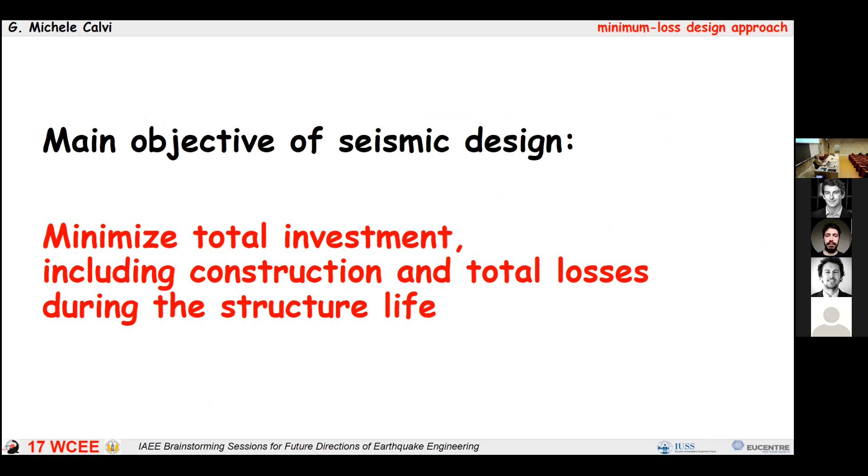But what does it mean, loss-based design? Let's try to go into this subject. The objective is clear: minimize the total investment, where total investment is what you spend to construct, what you spend to strengthen, what you spend to repair, and so on. This will become more clear in my next slides.

Of course, this is difficult as an objective to obtain, because the correlation between loss and strength is rather weak, and the correlation between loss and displacement is better, but still probably not sufficient.

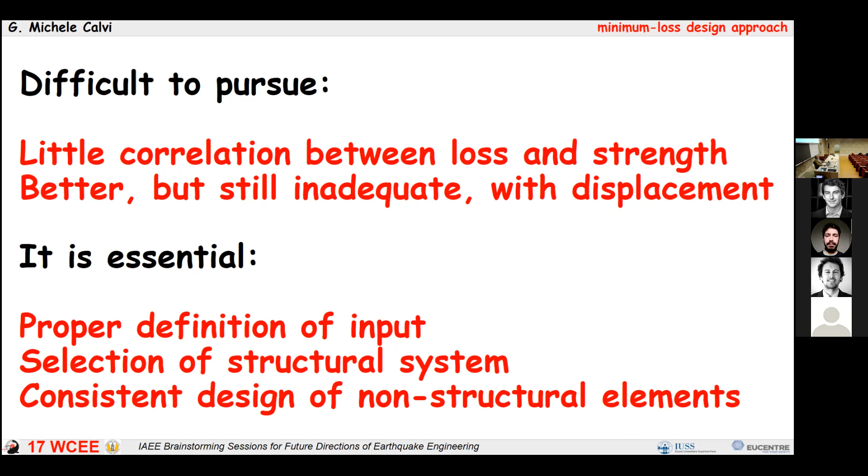There are, of course, approaches that have been developed more for assessment than for design. For example, probably all of you are familiar with the FEMA P-58 approach, and you are familiar with the separation of hazard characterization. First step, depending on where you are, you define hazard. Hazard is not only a certain acceleration or displacement value, but an association of intensity in terms of acceleration, displacement, and so forth, to a return period or a probability of exceedance over 1 year, over 10 years, or whatever.

The second step, familiar to all of you, is kind of a conditional integral. You look at the response of the structure: on one side you have intensity expressed as acceleration, displacement, or whatever, and on the other side you have consequences in terms of structural parameters. So for that input, you get that displacement, that interstory drift, or that floor acceleration, or whatever.

Then the third step is, as a function of the level of each of these response parameters, you try to figure out what is the consequence in terms of loss. In many studies, loss means direct loss, but as I will discuss, indirect losses are often much larger than direct losses, and therefore more relevant. The last step is a kind of decision-making, which is exactly what we mean when we say loss-based design.

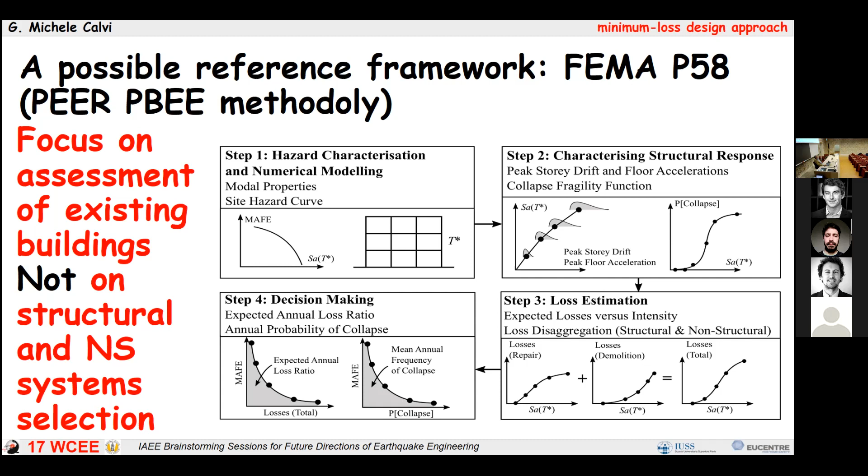Of course, when you talk about the second step, which is the one we've spent more time on, you may remember something like this. This is something I presented in Lisbon, I believe, at the World Conference, and it then became a paper saying, look, you could use some kind of pushover representation of the response of your structure, for a building in this case, and then you could say that for that level of interstory drift.

The level of interstory drift that you see on the right corresponds to that point you see on the left. Therefore, you could say that at that level of performance, you may expect a certain level of interstory drift, which means a certain level of expected damage, a certain cost of repairs, and so on. For this other level, you have another interstory drift and another series of consequences, and so on.

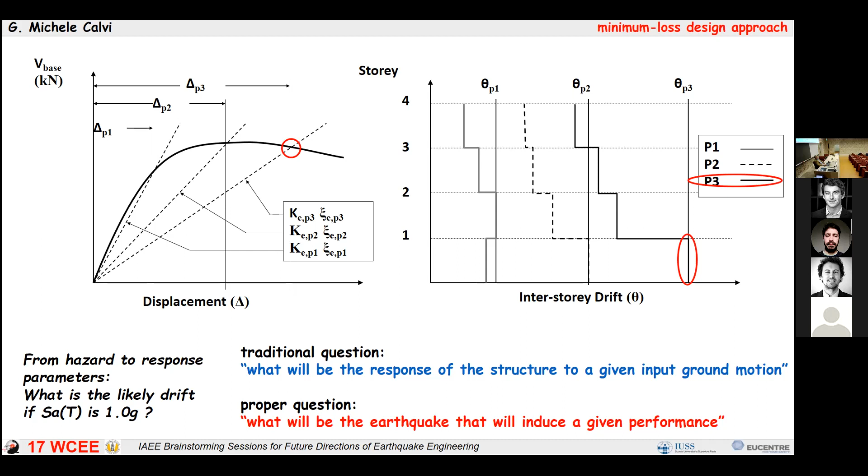So you can somehow associate some parameter that correlates response of the building and expected level of damage. We will talk about damage and loss soon. Now, when we talk about loss-based, it has become rather clear in recent years that the main parameter we're going to use is called expected annual loss. What is expected annual loss?

Expected annual loss is an integral of probability of occurrence times level of damage. If you consider that integral, you take a figure like this, which is only qualitative. You have on one axis the probability of occurrence, on the other axis, say for example, the expected direct damage.

What does it mean? It means that if you are up there at the top part of this drawing, you have a probability of occurrence which is high, which means that the return period is short. It could be that at the tip there, you have maybe 10, 20, or 25 years, or whatever. It means that it's the threshold level. For a higher probability of occurrence, you are assuming that the damage is below whatever you want to consider.

Otherwise, you cannot, you will go to infinite, and we do not like to deal with infinite numbers. If you look at the other side, at the point to the right, there the probability of occurrence is low, and if the damage is 100% in terms of direct damage, it means it is collapse, or a state of damage so high that it will be more convenient to demolish and reconstruct the building. So that point could be 100% in terms of damage and could be maybe 1,000 years, or 1/1000, or 1/500, or 1/2000, and so on. So you have the two opposite points.

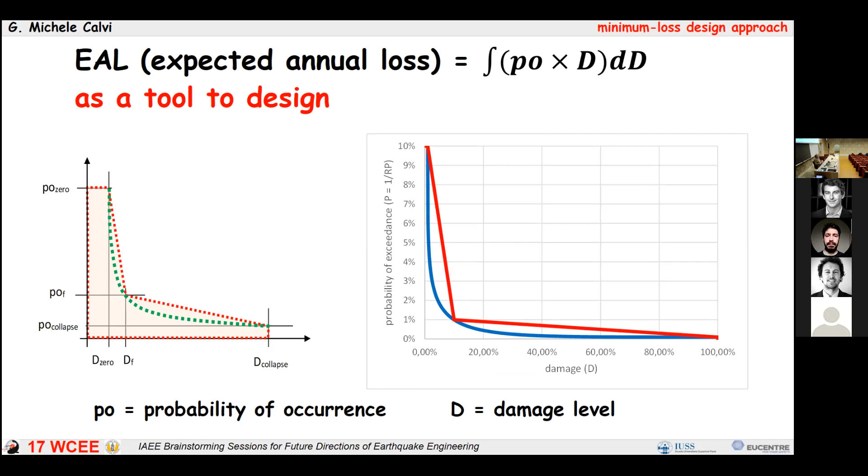We need to have some sort of representation of the entire curve that is not too far away from what actually happens. I don't have time to discuss this in detail, but this is an equation that I developed. I like it very much. You will understand why I like it very much. Let me say that this equation appears complex, but it's quite simple because there is only one parameter.

The parameter is that alpha that you see as an exponent to the sinus, and you see 1 over alpha as the exponent of the content of the reverse of the cosinus. You may wonder, how do you come out with something like this? I mean, this is very strange.

Some of you maybe know, but others can imagine how I came up with an equation like this. Okay, it's simple, because I was looking for an equation that, with only one parameter, was able to modify completely the shape of the curve while keeping 2 points fixed. Therefore only modifying the fact that it could be a straight line, could be thinner and thinner, but actually the same equation could also go to the other side. That equation, where you have the sinus to the power of alpha and the cosinus, is the equation that we use to represent the response of a damper.

And in a damper, you know that if you have say 0.1 at the exponent, it tends to become close to a square. And if you increase that, it goes down and down and down. It works beautifully. So you can just modify that parameter.

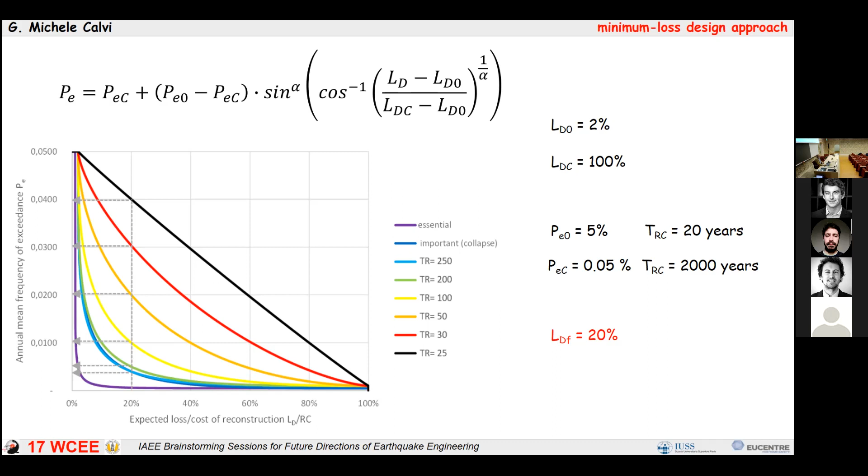So what I'm trying to tell you is something like this: if you accept to define the 2 points, for example, I don't know even what I've done here. You see, 2% at 20 years is the threshold. You don't care about the damage below 2%. Below 2% is nothing. And you have the other point that is here. I don't know what I use. Maybe.

I'm saying that if you decide that you want an expected annual loss of, say, 1%, you could know what level of alpha you should use, or vice versa. So the expected annual loss could become a real tool for design. You understand what I mean? A real tool for design means I'm accepting this level of damage. And of course, as a function of this level of damage, I will insure the building for that value, and so on and so forth.

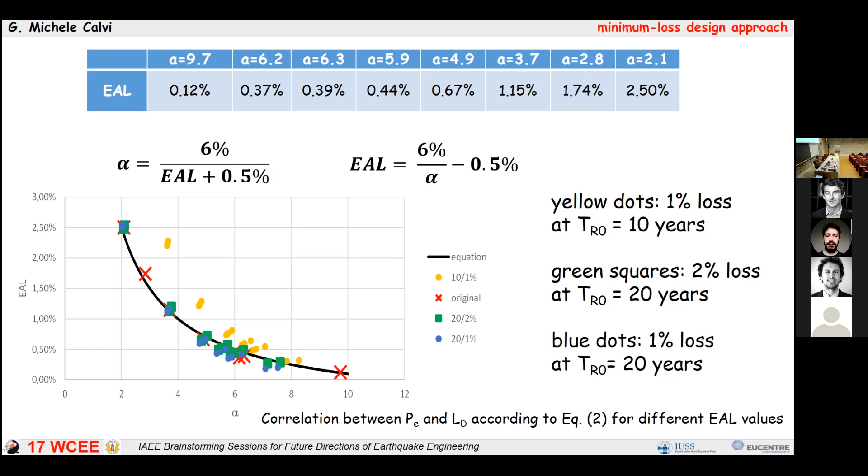What does this mean? Look here. It's like saying, if you take all these curves, they are different curves, characterized by different alpha. Or if you want, they are characterized by different values of the annual probability of exceedance and different values of the expected loss average per year. And if you take 72 years, as you know, that's the probability of occurrence of 50% in 50 years, which is often the figure that we use in new design for a state of limited damage.

And you say that maybe the state of limited damage is 20% of the cost of reconstruction, then you see that you are close to the green line, and the green line is expected annual loss of 0.8%, maybe slightly higher than that.

I'm trying to conclude in this part that we are often designing, without knowing it, for something which is in the range of 1% average expected annual loss for new buildings. If you ask, or maybe there are here people who work on risk assessment and so on, you will find figures that are much lower than this value. I tend to believe that the reason is that—

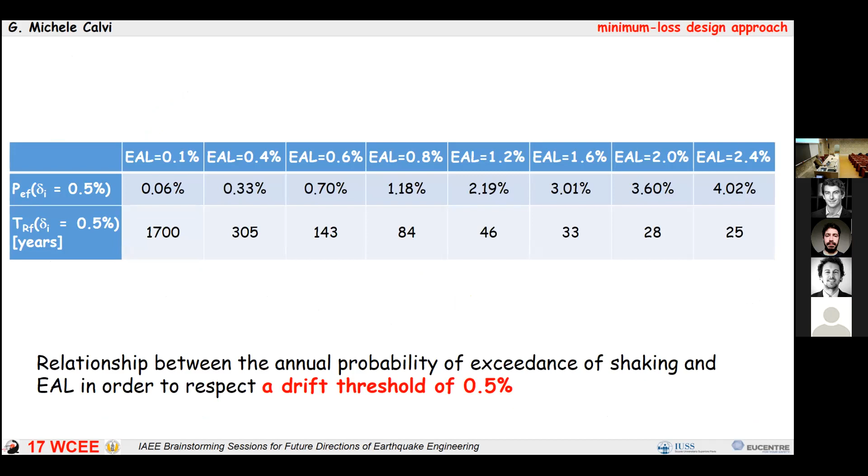But anyway, I'm ready to discuss this. And don't forget that I've not yet talked about the indirect losses. So this is exactly what I was trying to tell you. But there is one more point I want to underline. And let me go back, then I'll come back here.

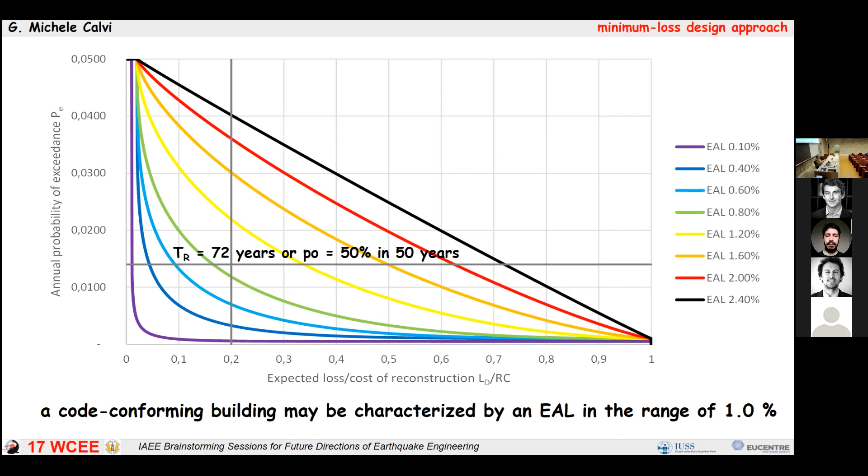So let's go ahead on this. And what you see in this plot is that the correlation between expected annual loss and one intermediate point of control is very strong.

But to modify the other two points, the threshold value and the probability of occurrence of collapse, does not change very much the shape of your curve. The losses are not significantly affected if you modify the probability of occurrence of collapse.

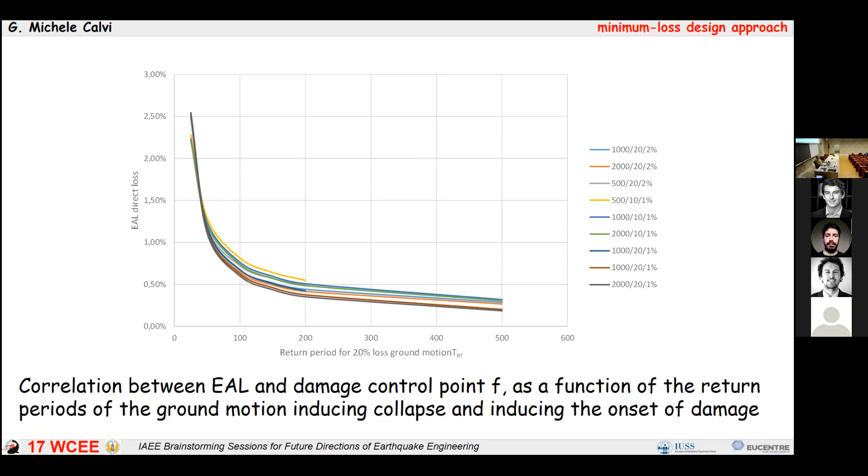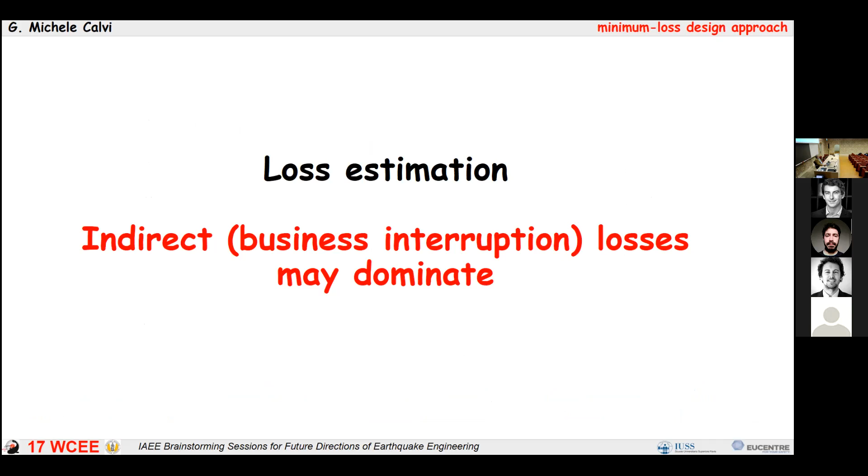Let me now have a quick glimpse into indirect losses. Indirect losses essentially is business interruption. As I already said, for a hospital it's not relevant—you want to have the hospital working after an event. But for other buildings or bridges, it may be relevant. So let's look at the simple case, the residential case.

Suppose that to relocate a person who remains without a place to live costs society—doesn't matter who is paying, I'm not talking about insurance or the state or whatever—35 euros or dollars per day. Suppose the cost of reconstruction is 1,000 euros per square meter, and suppose that on average a person occupies 25 square meters. These are all assumptions; you can change these figures.

If you accept that, and then consider that if a building collapses—so 100% damage—maybe the time for reconstruction is 2 years, then you do a simple calculation and find that the ratio between the losses due to indirect costs, defined here as relocation of people, and the cost of reconstruction is about 1. This means they are in the same order of magnitude. If you take 2 years, the cost is about 0.14% of the total cost of reconstruction per day.

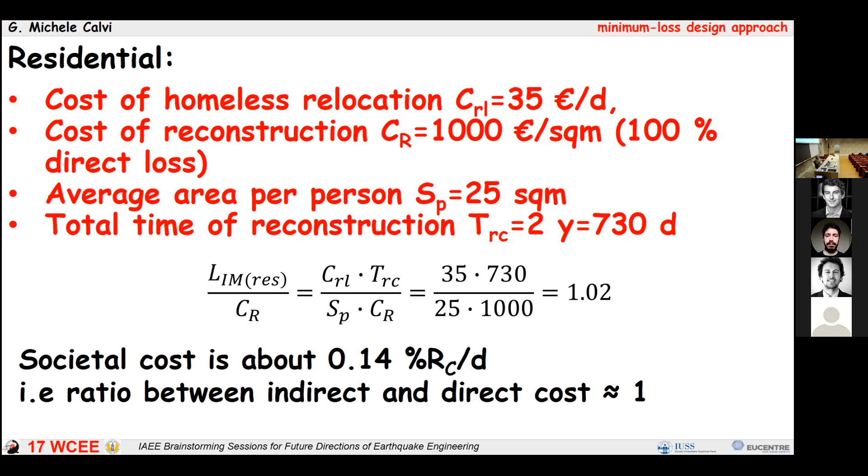But if you do the same calculation for bridges, you change your point of view: you say I have a certain number of vehicles crossing the bridge—this is easy data to obtain—and then you know what the detour length is. If you cannot pass on a bridge, how many kilometers do you have to go? Then you consider a cost per kilometer—consuming gasoline, increasing pollution, and so on. This is a general societal cost.

And then you do the same thing. You find out that for important bridges—which doesn't necessarily mean long bridges, it could be an overpass on a freeway with 10,000 vehicles per day, so a small bridge—the indirect cost could be much higher, could be 5 times.

If you go into the industrial problem, it's impossible to do this calculation directly. You can only go and interview the owner and ask, what is for you the cost of stopping your activity? But you should also remind him that his cost is also losing clients who will go elsewhere—it's very difficult to conquer a market again once you lose it.

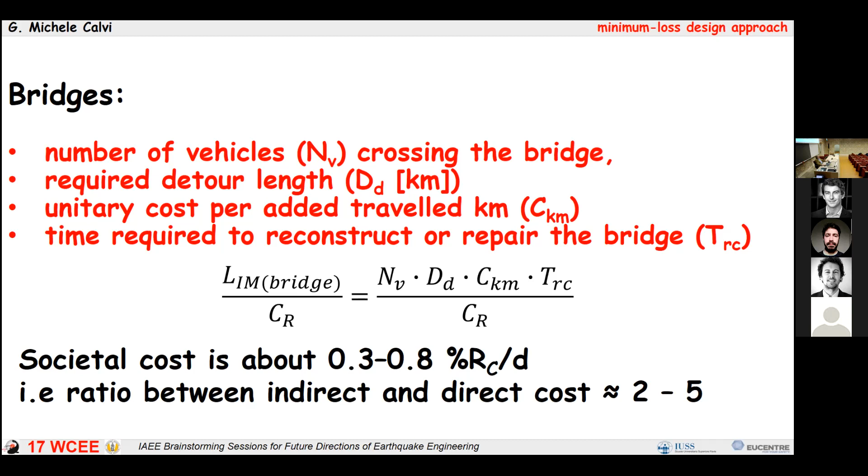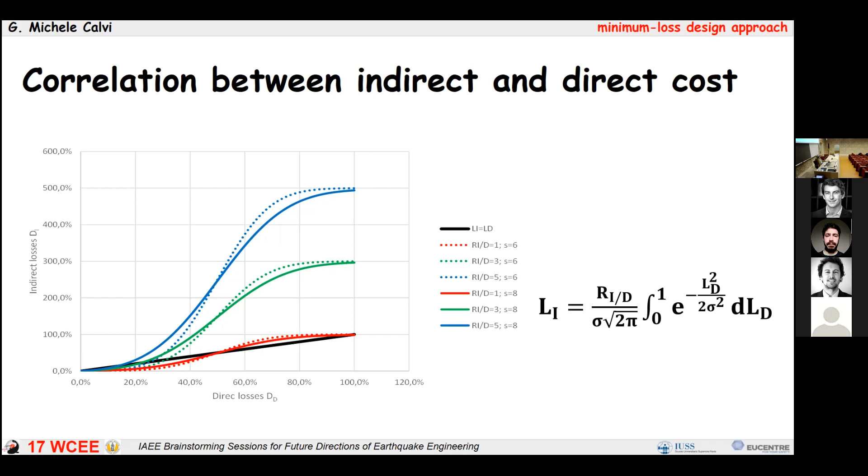So you use something like this and do all your exercises, and you come out with something like this, where the equation I showed earlier—expected annual loss equals 6% divided by alpha minus 0.5%, or the reverse—now seems a bit more complex, but not that much, because here there is RI over D, the ratio of indirect to direct losses. This comes out with something like this, and the dots are calculated points—you see this is not too bad again.

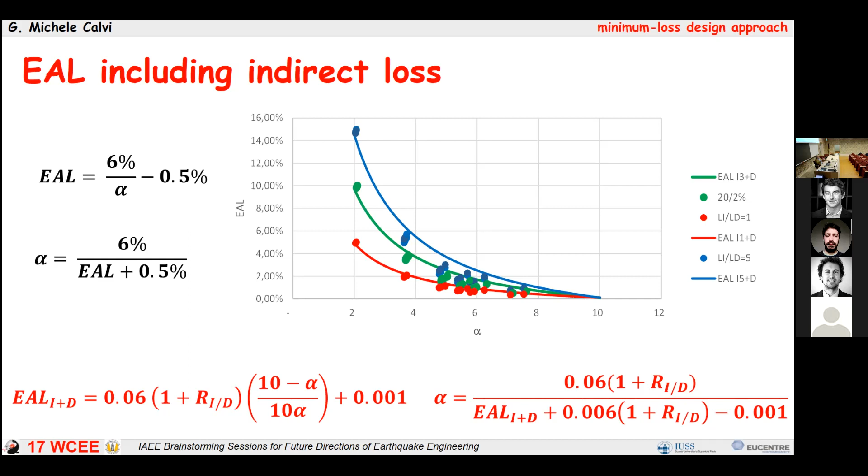So you see that your expected annual loss is increasing very much and is rising rapidly here. This kind of curve tells you that, if you look only at losses, your target design is probably in the area where the curve is not steep anymore and tends to become flat. There is no reason to design for a point close to the end of this curve, because you are not increasing the quality or increasing your savings. It will not be convenient. You should go to a point where you're still decreasing, and then you go.

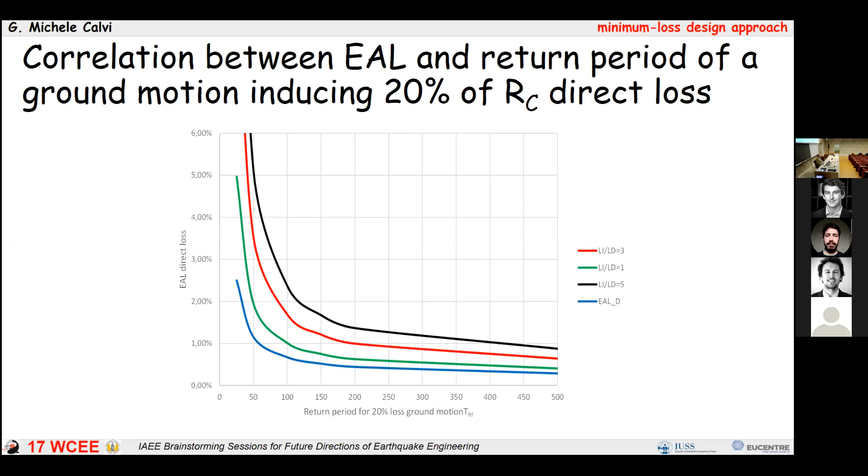So it means that for the black line, you will move to the right with respect to the blue line. It means that you will design for a longer return period or a lower probability. If you have more damage, if you are expecting more loss, you want to design for a lower probability of having an input ground motion that will induce the same level of damage.

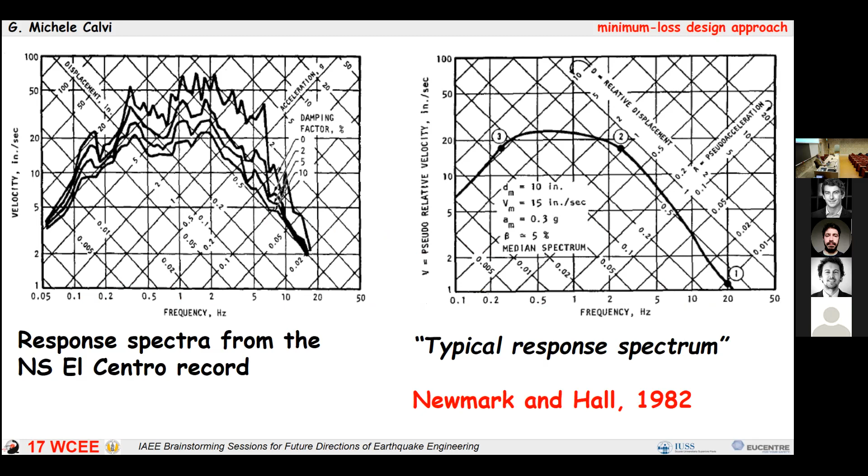Now I will go very quickly because I've already discussed this in other seminars, and maybe some of you were here. Of course, there are a number of ingredients that enter this discussion from a practical point of view. One ingredient is the definition of seismic input. Guido Andreotti has been working with me on this a lot. You may remember, if not go back and read again, what happened between the 40s and the 70s, where the spectra were defined.

You are probably familiar, or will be familiar, with displacement-based design, where the logic is that instead of using a force reduction factor, which could be 3, 4, 5, or 6 — a huge change — I only use a correction that takes into account the dissipation of energy. This correction factor is probably in the range of 0.6 or 0.7, certainly not smaller than 0.5, or 2 if you want to use the reciprocal. Using many different possible equations, you see that for a ductility of say 2 or 3, you are in a range of 0.6 plus or minus 10%. If you are in that range and talking about preliminary or conceptual design, that's good enough. I don't want anything better than that.

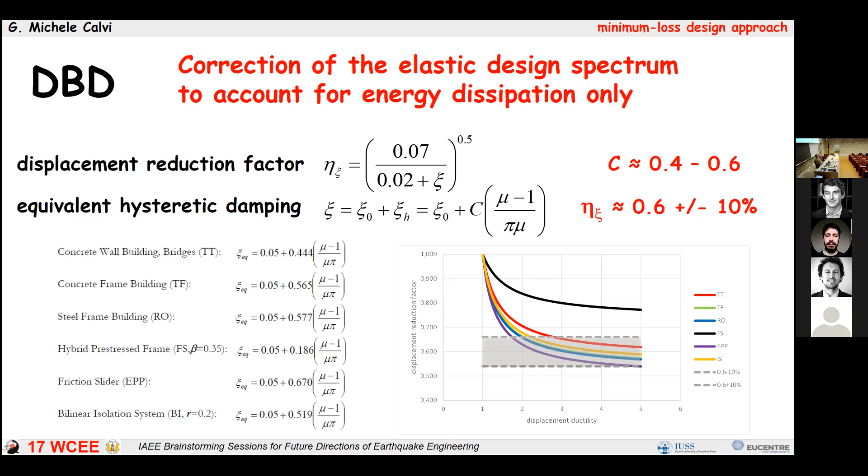And then if you go ahead — this, I don't want to spend time on — this is my view on how to revise spectral shapes, but that's not the subject of today. So if anyone is interested, just talk to Gerard. I gave another seminar on the subject.

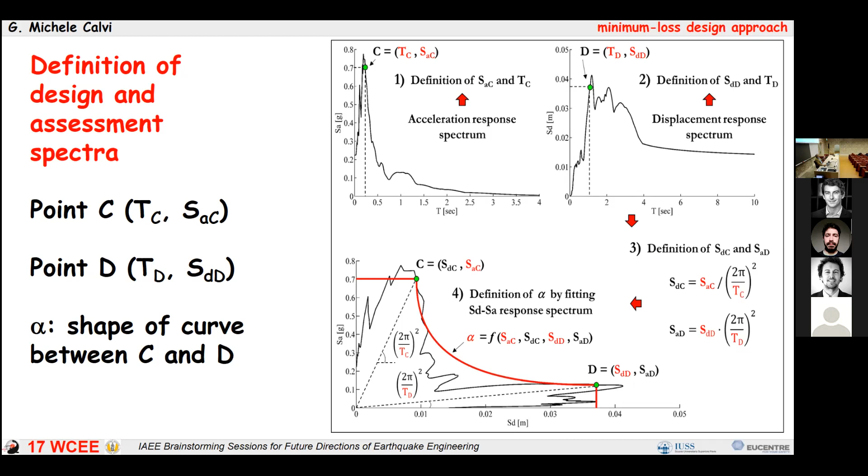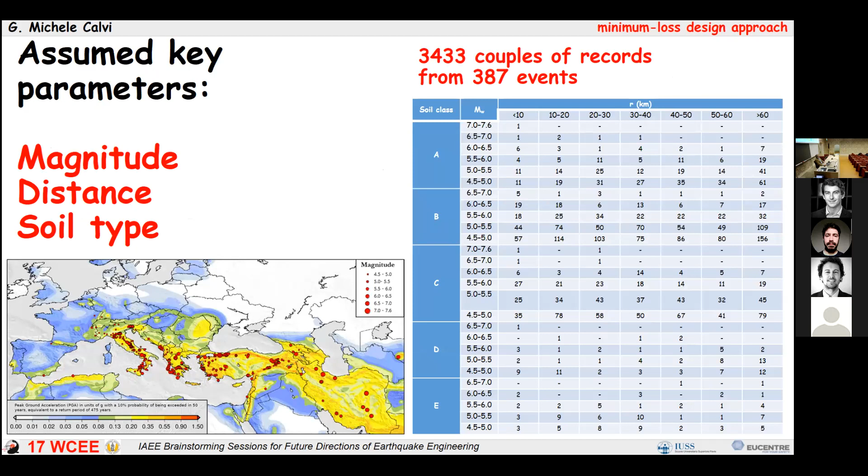We examined some 7,000 ground motions on different kinds of ground to try to define the expected spectral shape as a function of magnitude, distance from the epicenter, and soil condition. We found tendencies that were obvious 50 years ago, in the sense that if you have a strong earthquake and a location close to the epicenter, meaning a large acceleration, it is possible that for soft soil, the soil will go into the nonlinear range. If that happens, you will increase the displacement demand, but not increase the acceleration demand. The acceleration demand is governed by the capacity of the soil.

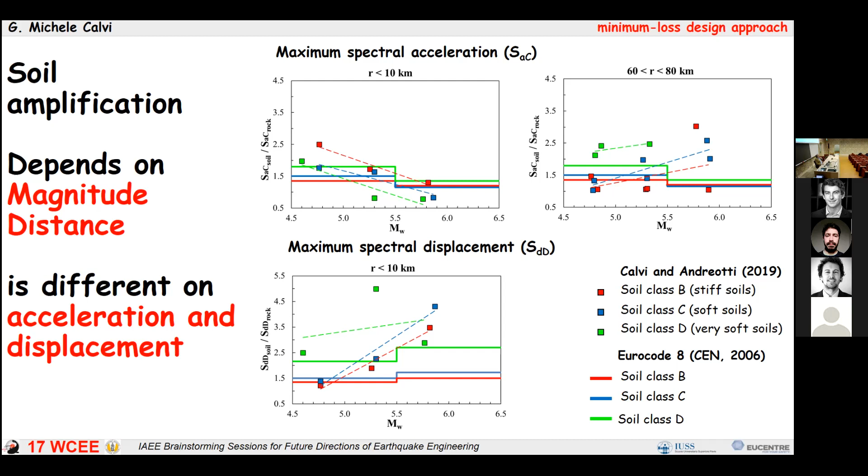On the opposite, if you have the same earthquake but go further away from the epicenter and the demand decreases, the soil will not go into the nonlinear range. Therefore, you may have a larger amplification in the acceleration that is now not capped by the response of the soil. So all this allows us to define spectral shapes like these ones.

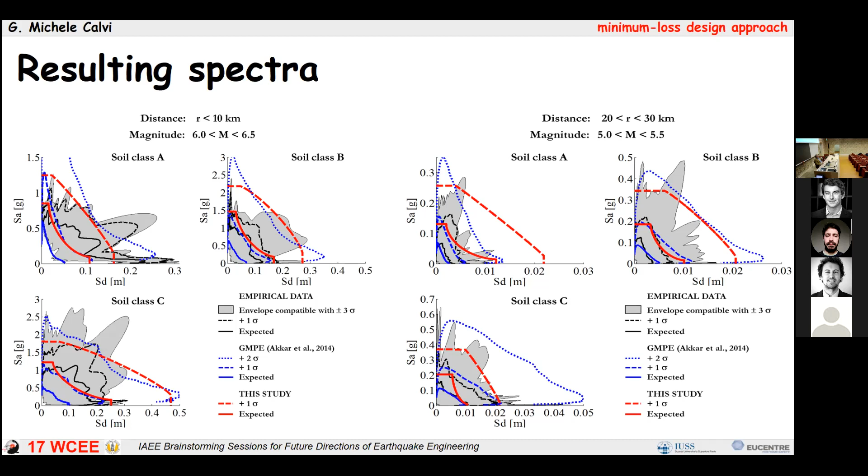Our shapes are the red ones that, depending on the probability you want to use — meaning going for plus 1 sigma or plus 2 sigma with respect to average conditions — give a different shape. Remember that in the vast majority of the spectrum, which is what was once called the constant velocity, or conservation of velocity, region, if you use conservation of velocity you have a curve that goes down rapidly, so it's concave. But here you have convex response in certain cases, which means that if you think in terms of a pushover curve that intersects this, the intersection point could move away a lot.

Account for energy dissipation. I don't want to spend time on this, I plan to finish in maximum 10 minutes. But in the last years, often I have been wondering why we should take a parameter which is a structure parameter.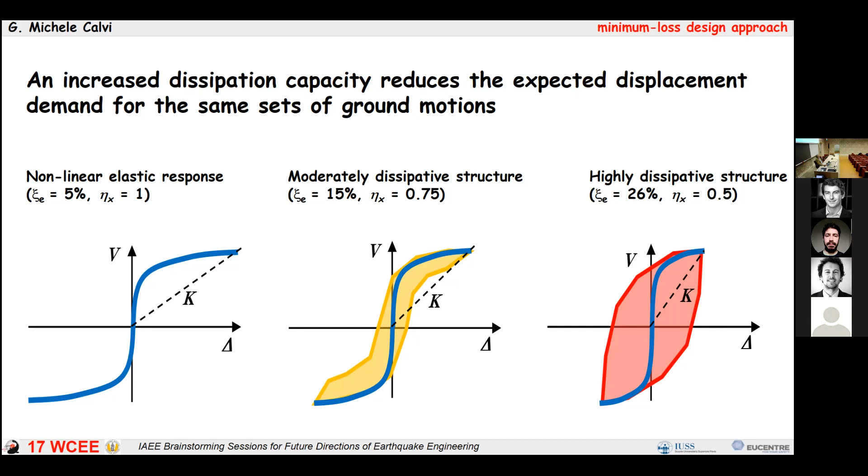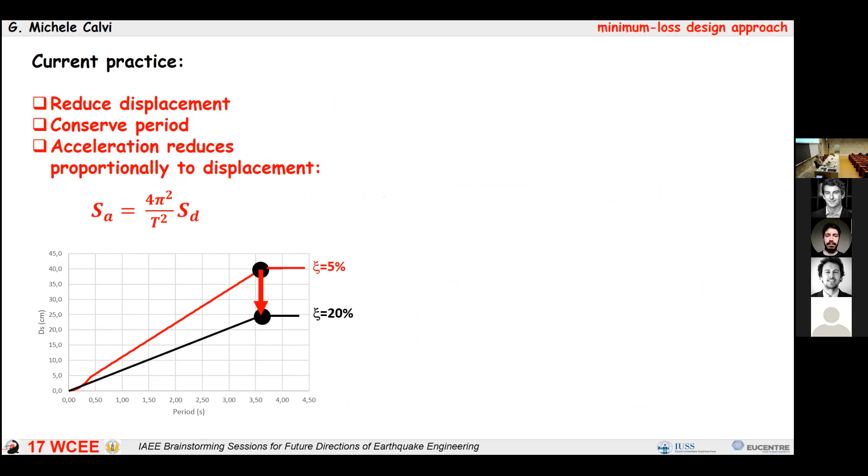So this means that you are modifying the displacement demand, but you are not much modifying the acceleration demand. And therefore, you are modifying the equivalent period of vibration. If you look in terms of what we have done in the past and we are still doing, if we take an elastic spectrum, then you take this point and you move it down here.

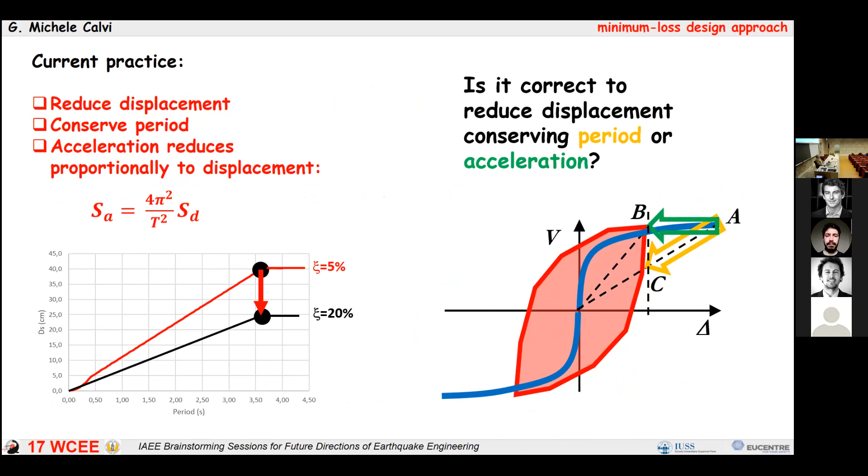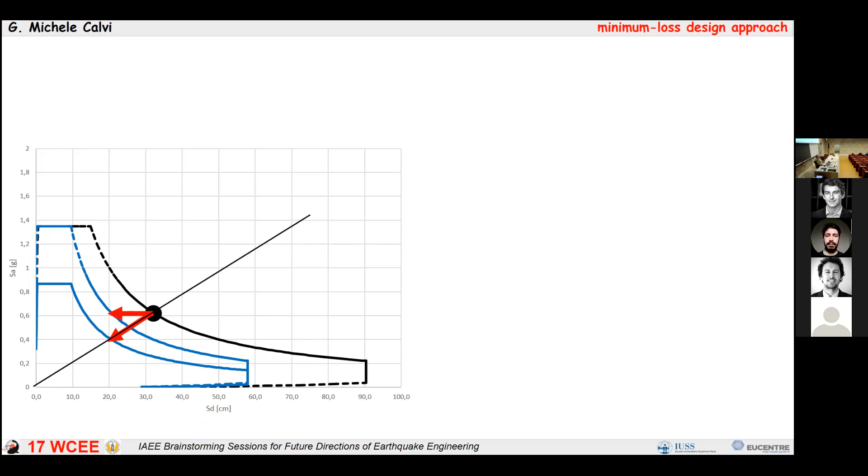In this way, you are conserving the period and modifying the acceleration. You see, you are going along the yellow arrow, not along the green arrow. If you want to go along the green arrow, that point should not go there, should go there. You want to keep the acceleration and reduce the period.

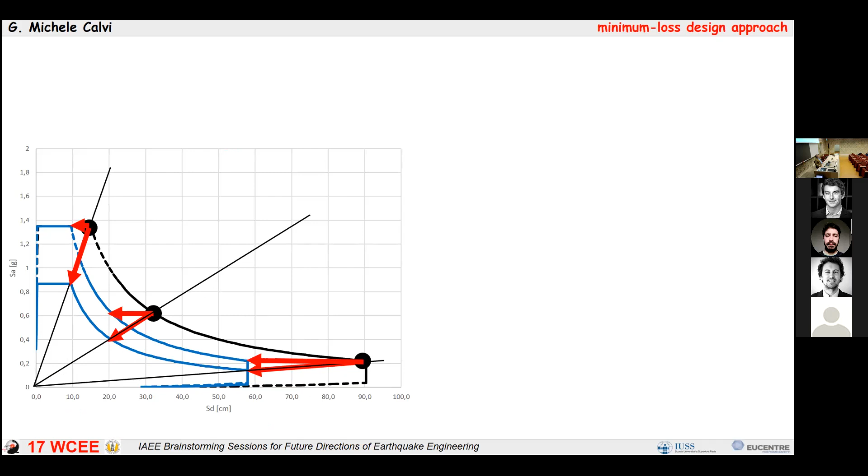So that point, the difference is that in stiff structure, you're not at a benefit. This is what our ancestors were doing in the 70s, conserve acceleration for very stiff structure. So you have a different shape, and this can have consequences.

Now, design for loss control, so that I keep my promise to finish in the next 5 or 6 minutes. Suppose that now you are able to define a number of spectral shapes like the blue ones, like the blue one here, because there is only one here. And that's the shape that you want to use for a long return period case, so you have a large magnitude at a close distance.

And then you have a number of other cases in which you may have a large magnitude at a longer distance, or you may have a smaller magnitude at a closer distance, and maybe you have spectral shapes like the black or the red one. What does it mean? It means that probably you may say that the blue one here has a probability of occurrence of maybe 1/1000 per year, and the red and black have a probability of occurrence, you tell me, of 1/100 or whatever.

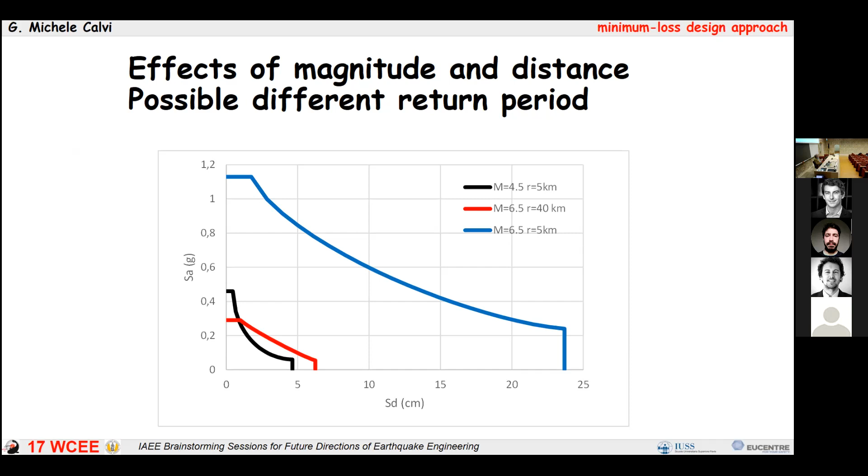Now, if you want to design to contain the loss, the black and the red shapes are fundamental. And you want to limit the acceleration, the floor acceleration, because there are elements that are sensitive to the floor acceleration. And you want to limit the displacement or the interstory drift because there are many more elements that are sensitive to that. So what you may wish to do is to cap horizontally the maximum acceleration that you are designing for, and cap the maximum displacement you are designing for.

Which means that you have to design a structure that, for this rather frequent event, should stay between the red and the black arrow. If you have a stiffer structure, you might have an excess of acceleration and a certain kind of damage. If you want to have a more flexible structure, you may have other kind of damage because you have a larger drift, interstory drift.

So you can have doors that could not open anymore, and so on and so forth. So you're not free. You should stay in there, and you are still in a response which is not necessarily elastic, but close to be elastic. The structure has not yielded yet.

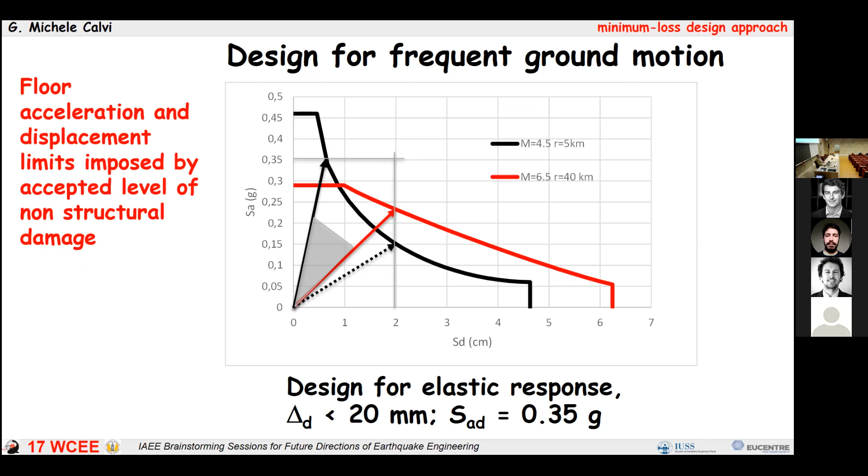So you need again ductility, you need again displacement capacity, because you want to stay in low damage. You want to have a relatively stiff structure. But of course, this applies to a building where you can accept to have a situation that maybe has some significant damage for a low probability ground motion.

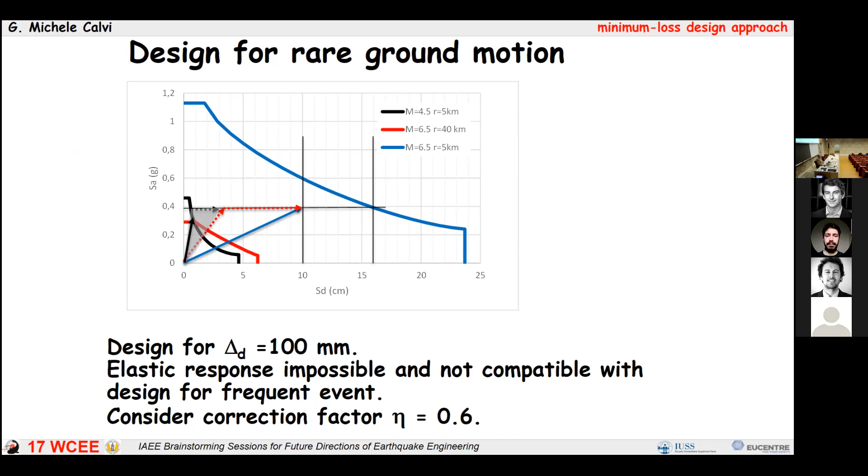If this does not happen, what happens? Look at this. If you want to design for continued use in case of a rare ground motion, it means that you want to cap acceleration and displacement with reference to the blue line. But if you take the same cap as before, the intersection is here. There is no possibility, because you want to stay to the right of one line and to the left of the other one, but in the wrong combination. So there is no solution.

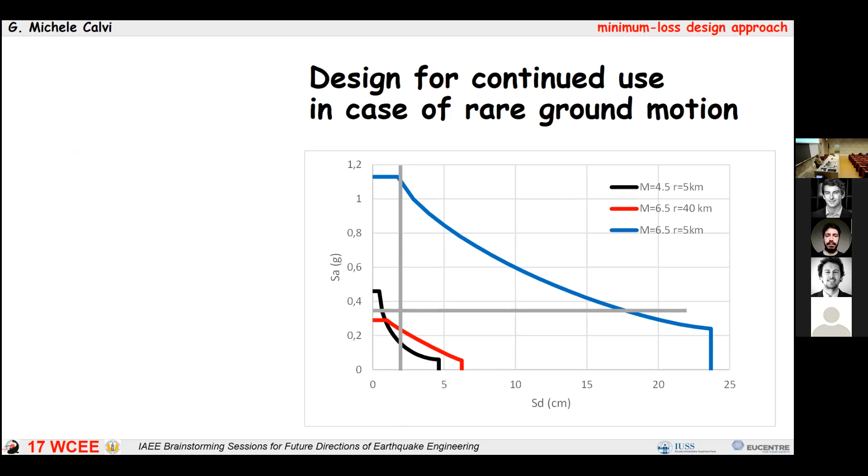There is no solution. What happens? It means that you have to find another solution. What could be the other solution? You cannot stay as I was saying - the intersection is such that if you want to stay lower than the blue one and higher than the red one, there is no possibility.

But could you accept to do something like this? Here is where you have a few options. One option is to design non-structural elements capable of taking larger acceleration and larger displacement. So you may have a hospital that behaves like another structure, but where everything inside is not sensitive to what's happening. Or you could have another solution, which is to recur to isolation or to tuned mass.

This has not been rationalized in the past, but I remember many years ago, I designed an isolation system for a nuclear power plant in France. And I was wondering, why should I design this isolation system? It doesn't make any sense to me - there is so much strength here. But then things became clear to me. The point was that having an isolation under that structure was reducing by many times the acceleration inside that big mass that was essentially infinitely stiff. So the acceleration of whatever was inside the nuclear power plant would have been the same as the solid structure. But if I put a base isolation, it becomes maybe 1/10 of that. So there was a good reason that had nothing to do with the strength of the structure, nothing.

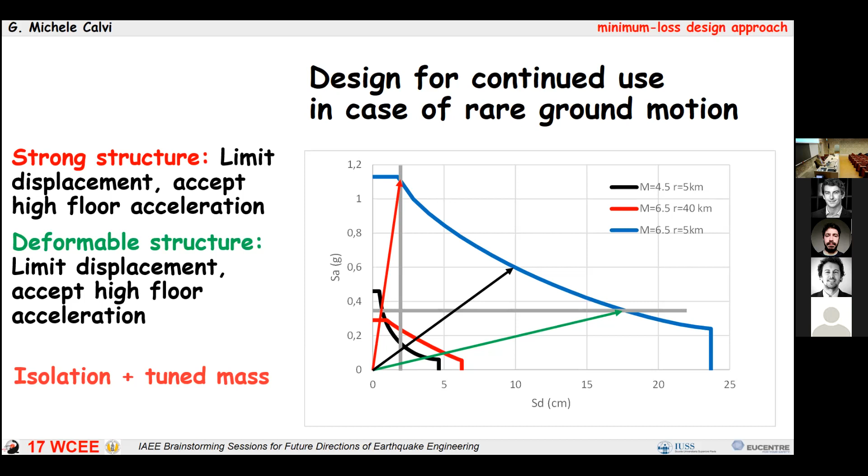Okay, so I'll try to conclude. We today are dealing with displacement-based design, which is probably today the best tool, but we can work on this procedure to try to improve our capacity. At the end, we will anyway have to say what should be the size of a column or the thickness of a wall or whatever. We will get to materials at the end, but with something different in mind.

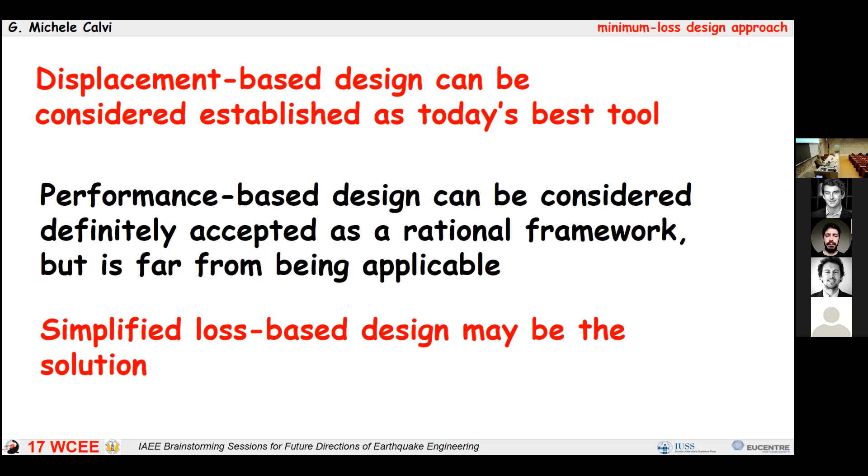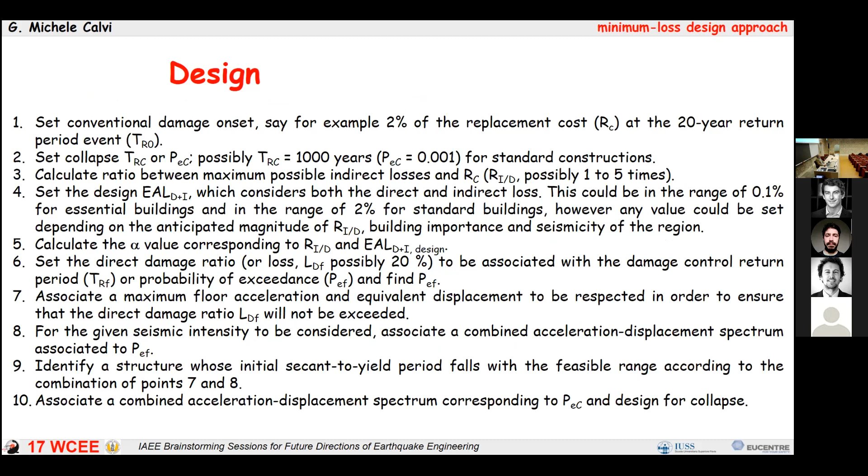In a paper that recently appeared in Earthquake Engineering and Structural Dynamics, we have tried to describe a possible sequence of steps to design according to these criteria, and the sequence of steps to assess according to these criteria. This list of 10 or 12 points is a real indication of what to do. It's not philosophy, but there is a long way to go - we have tried this on different kinds of materials, different kinds of structures, and so on and so forth.

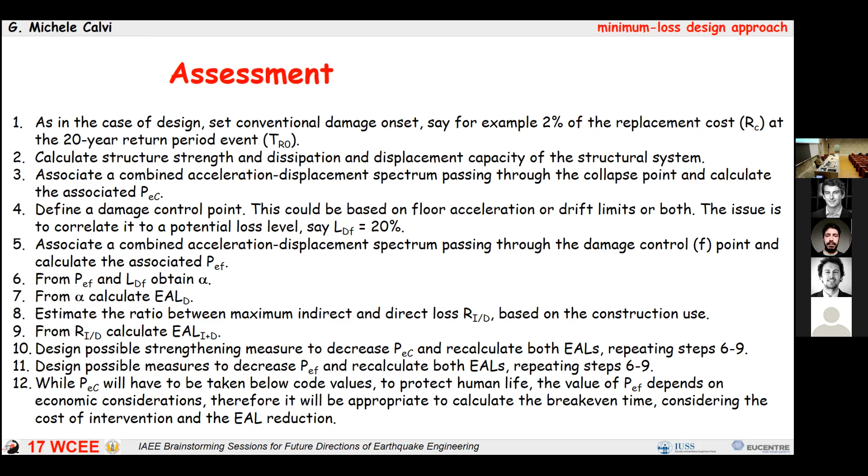And I stop here. If you want, I'll show you what was my last slide in Japan, but this is just for fun - my last slide in Japan was looking forward to seeing you all in Milan in 2024. I hope that this will induce some of you to think and to say I'm totally wrong. I'm old enough to easily accept that someone is demonstrating that I'm not working in the right direction. But I really believe that in what I've been discussing with you, there is a lot of material that could be used for future research and work in the next years.